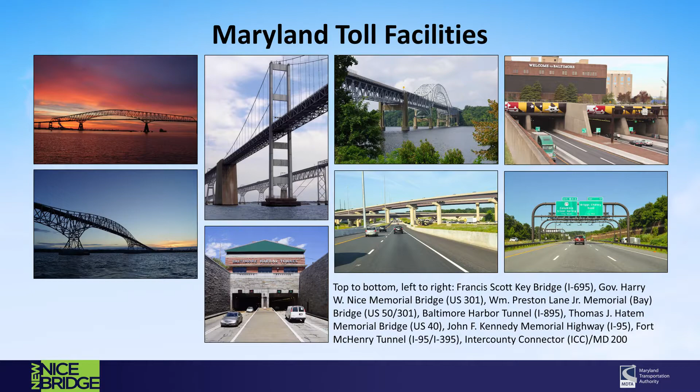Hello, I'm Kevin Reigrut, Executive Director of the Maryland Transportation Authority, or MDTA, the agency that owns, operates, and maintains Maryland's 8 toll facilities, including the Harry W. Nice Memorial Bridge carrying US 301 over the Potomac River from Maryland into Virginia, better known as the Nice Bridge. The MDTA is committed to providing premium transportation facilities and superior customer service.

We're different from most Maryland agencies in that we're affiliated with state government, but we don't receive funding from the general fund or from the Transportation Trust Fund. We're self-sufficient, and every dollar spent on your tolls gets invested right back into our facilities.

We are excited to be preparing for the replacement of the Nice Bridge, and thank you for taking time to learn more about the new Nice Bridge project. We want to update you on how the MDTA has worked to advance this project beyond the original study phase, the project schedule, and what you can expect during construction.

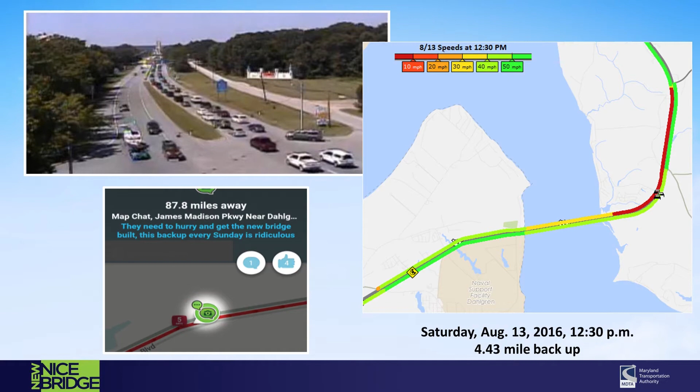In November of 2016, Governor Larry Hogan officially dedicated funding for design and construction of a new Potomac River crossing connecting Charles County, Maryland and King George County, Virginia. The existing bridge is more than 75 years old, and anyone who drives across it on a summer Friday or Sunday evening knows about the significant backups and delays because of its current 2-lane configuration.

As a strong advocate for replacing the Nice Bridge since taking office, Governor Hogan announced the advancement of the project, noting its importance to the nation's security and to the quality of life of the thousands of people who depend upon the bridge for work, business, and recreation each and every day.

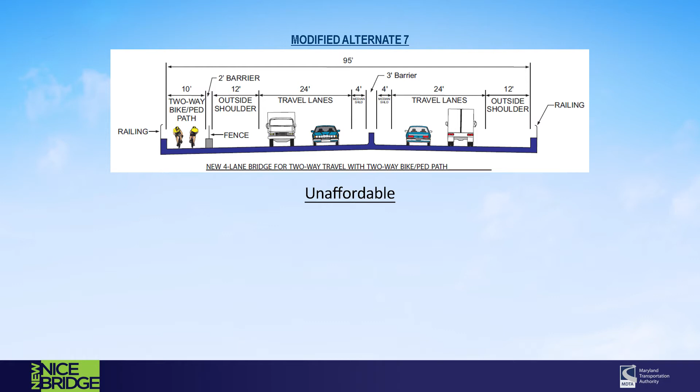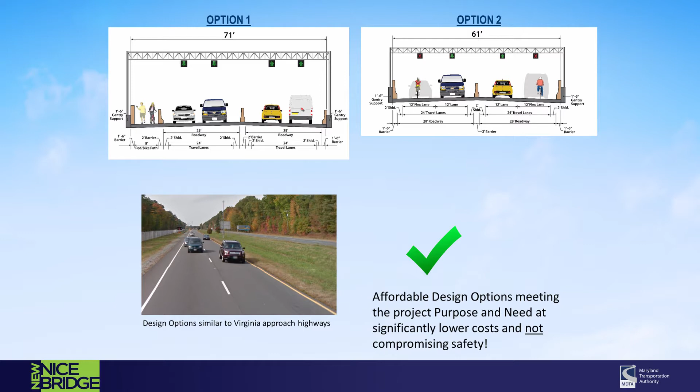Since that announcement, we have been working diligently with our project partners to cut project costs by more than $200 million from the original 2012 study estimate. These efforts have made the project affordable and have allowed us to meet customer demand for a wider, safer bridge much sooner than could otherwise have happened.

So, how are we going to build this bridge? And what should you expect? For that piece, I'll turn it over to Will Pines, the MDTA's Director of Project Development.

Thank you, Kevin. Thanks to Governor Hogan's commitment, the MDTA plans to advertise for construction in fall 2018 and anticipates breaking ground in early 2020, with the new 4-lane bridge opening to traffic in 2023.

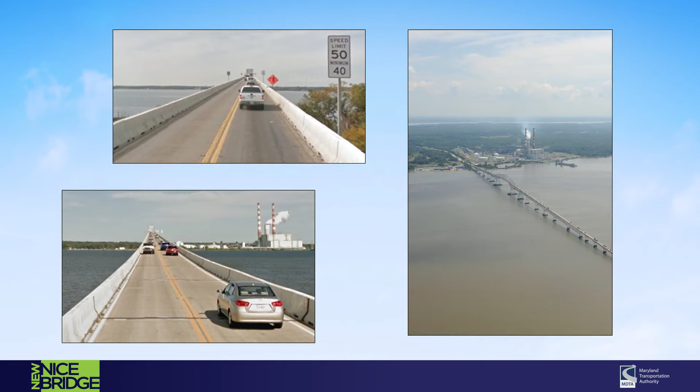During construction, drivers can expect minimal traffic impacts because the existing Nice Bridge will remain open until the new bridge is completed. Any impacts to traffic would be of short duration during off-peak and overnight hours, for example, when crews are moving equipment or when the new approach roadways are being tied into the original highway.

Be assured the MDTA will notify motorists of any anticipated traffic disruptions via traffic advisories, social media, overhead message signs, and more. We also will work with the U.S. Coast Guard to alert mariners of any navigational changes as the bridge is being built.

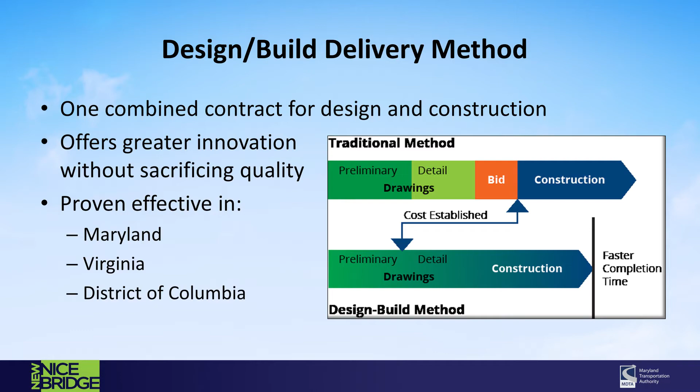We will deliver the project using the design-build method, which allows the MDTA to advertise one combined contract for design and construction services. This delivery method provides opportunities for the design-build team to offer greater innovation without sacrificing quality. It has been proven successful on similar projects in Maryland, Virginia, and the District of Columbia.

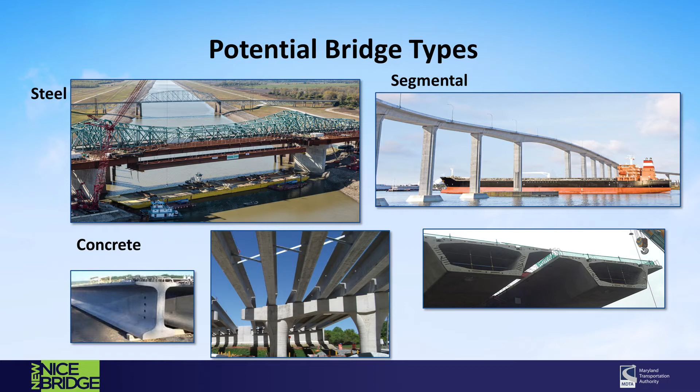For our project, design-build teams will have the opportunity to propose the type of bridge that's the best value to the state and appropriate for this crossing, whether steel, concrete, or segmental construction. The MDTA will hold an industry forum in spring 2018 to provide interested design-build teams the opportunity to learn more about the project and our bid requirements. I encourage those in the industry to visit the project website for more information in the coming months.

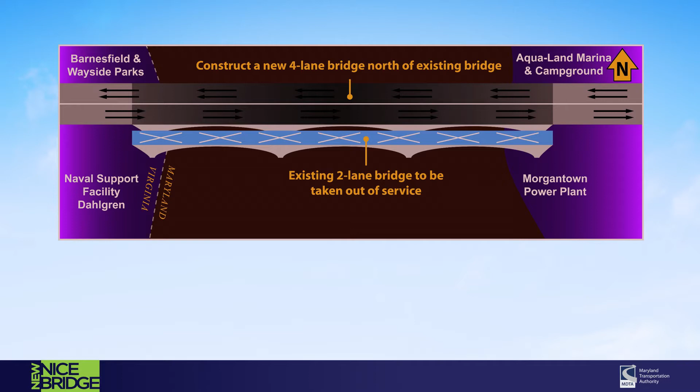Even though the successful design-build team will design the bridge, we do know the new bridge will include certain elements. The new bridge is planned to be built north of and near parallel to the existing bridge. It will have 2 12-foot travel lanes in each direction, separated by a median barrier, and 2-foot wide inside and outside shoulders in each direction. This design ties in consistently with the roadway width on the Virginia side.

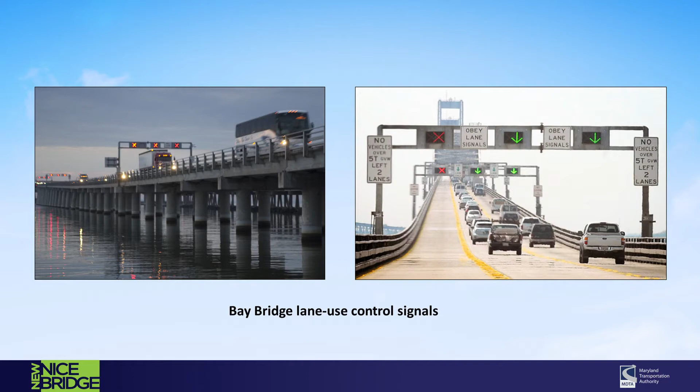The additional travel lanes will improve traffic operations by eliminating the bottlenecks along US 301, and the median barrier will enhance safety by separating opposing traffic. We also will be adding lane use control signals above the roadway, similar to what we use now at the Bay Bridge. That will assist with lane closures and emergency situations.

The bridge design, with 4 travel lanes and 2-foot shoulders next to each barrier, is very similar to the 4-lane Francis Scott Key Bridge on I-695 in the Baltimore region.

The Key Bridge safely operates with this design with more than 31,800 vehicles per day, which is 70% higher than the current Nice Bridge traffic at 18,600 vehicles per day. Based on our detailed traffic forecasting, we have determined that the new Nice Bridge design will support projected traffic volumes for more than 100 years into the future.

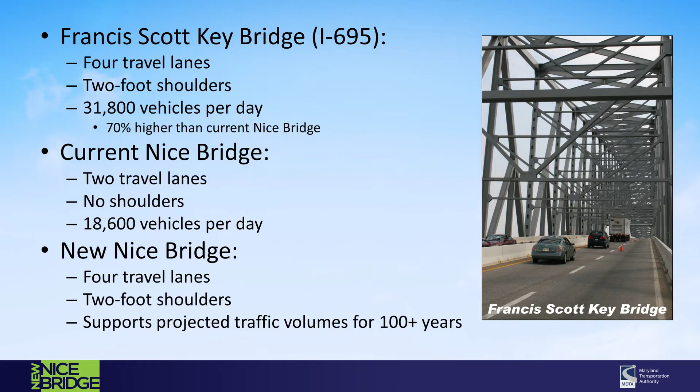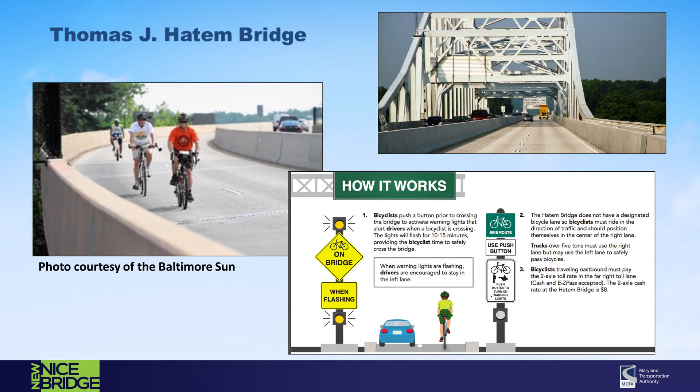The planning study concept included the option for a barrier-separated shared use path that the MDTA estimates will cost $60 million. Following the success of a shared bike lane on the US 40 Thomas J. Hatem Memorial Bridge in our northern region, which incidentally also has a similar design width to the new Nice Bridge,

the MDTA is evaluating the viability of a shared bike lane on the new Nice Bridge. We will be using a bid alternate approach, requiring proposers to submit prices for 2 options in their proposals: one including a barrier-separated shared use path, and the other including a shared bike lane. The MDTA board will select the option on a cost-benefit basis to ensure a best value design is delivered to our toll-paying customers. Whichever option is chosen, bicyclists will be able to ride their bikes over the bridge.

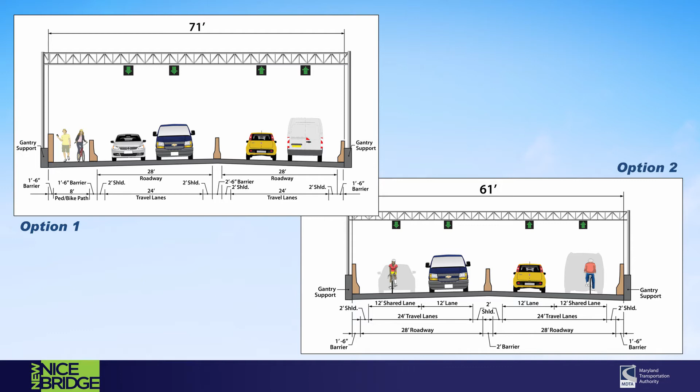The maximum grade will be increased from the current 3.75% grade to 4%, another similarity to the Key Bridge. The current design shifts the center line of the existing navigational passageway 585 feet to the west. It also reduces the main span length from its current 480-foot passage to a minimum horizontal clearance of 250 feet for the navigational passageway.

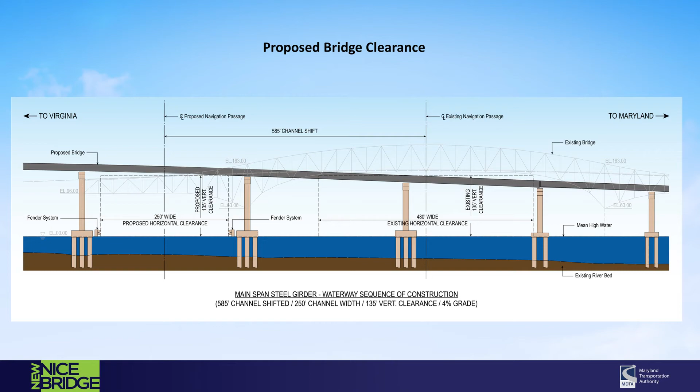The next bridge crossing of the Potomac River, the Woodrow Wilson Bridge, provides a minimum horizontal clearance of 175 feet. We will also be maintaining a vertical clearance of 135 feet to allow upstream ports such as the City of Alexandria to continue to host tall ship events.

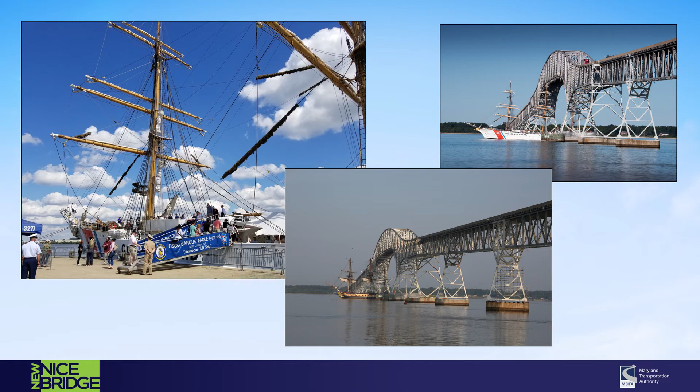Together, these profile modifications reduce the structural length of the proposed bridge by 1,000 feet from the proposed length in the original 2012 study, resulting in a total proposed bridge length of 9,850 feet.

The MDTA is working closely with the U.S. Coast Guard and the Federal Highway Administration to confirm that these modifications meet the reasonable navigation needs.

In addition to the Federal Highway Administration and U.S. Coast Guard, we have many other project partners, including Charles County, Maryland, King George County, Virginia, the Virginia Department of Transportation, Dahlgren Naval Support Facility, and numerous environmental and regulatory agencies, just to name a few.

Through our partnerships, the MDTA will continue to seek opportunities to keep you informed as the project progresses. Now I'd like to turn it back over to Kevin.

Thanks, Will. The final enhancement of the new bridge that we are excited to deliver to you is the tolling method. The new bridge will include all electronic tolling, meaning tolls are collected automatically at highway speeds using E-ZPass or video tolling, which is also known as post-usage billing.

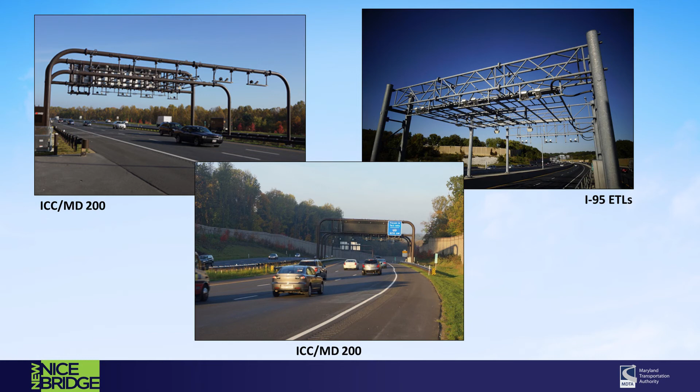This approach is successfully used every day on the MDTA's Intercounty Connector Maryland 200 facility and the I-95 express toll lanes in Northeast Baltimore, and is rapidly becoming the standard method of toll collection in the United States. All electronic tolling provides numerous benefits to our customers, including improved customer convenience and reliability, safer operations, reduced fuel consumption and vehicle emissions, and potential long-term reductions in toll collection and maintenance costs.

As we get closer to construction and the bridge opening, we will provide you with many opportunities to sign up for E-ZPass, since cash payment of tolls will not be accepted at the new facility. But if you don't already have a Maryland E-ZPass, I'd like to encourage you to sign up today to start enjoying the many benefits this program has to offer.

We've eliminated the $1.50 E-ZPass monthly account maintenance fee for customers with Maryland addresses, or out-of-state addresses who take 3 or more trips through Maryland toll facilities during the previous statement period.

And, even better, E-ZPass Maryland customers save 25% or more every day off the 2-axle cash rate at most Maryland toll facilities, and pay lower tolls than the video tolling option on the Intercounty Connector Maryland 200 and I-95 Express toll lanes, and much more. With no monthly fee and a 25% discount on tolls, there's never been a better time to be an E-ZPass Maryland customer.

To wrap up, let me tell you what you can expect. As Will mentioned earlier, construction will start in 2020. We anticipate minimal impacts to traffic during construction, since the new bridge will be built next to the existing bridge, allowing us to keep the existing bridge open during construction. We are committed to delivering this important project as affordably and efficiently as possible, and to providing motorists with a new, wider, safer, and less congested modern bridge beginning in 2023.